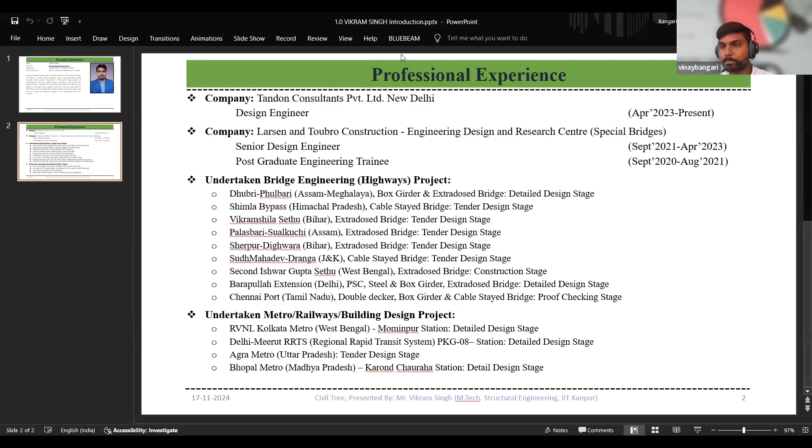Okay, I think I can stop screen sharing. Okay, so just give me a minute. I will start my presentation. Okay, so I hope my screen is very clear and visible to everyone. Yes, it is visible, sir. Thank you. Thanks for the confirmation. So today's webinar, we are including, just a sec. I will just make myself comfortable with the screens because I have two, so I have to take care of everything here. Okay. So thank you very much, Vinay, for introducing me.

Today we are going to have a webinar over the topic, bridge engineering. The broad topic is bridge engineering, but we will be covering a lot of things in this session, starting from the introduction to the bridges, what is a bridge, what kind of bridges we have in our Indian history or Indian modern era, then the classification of bridges, the components of bridges, then design and construction challenges.

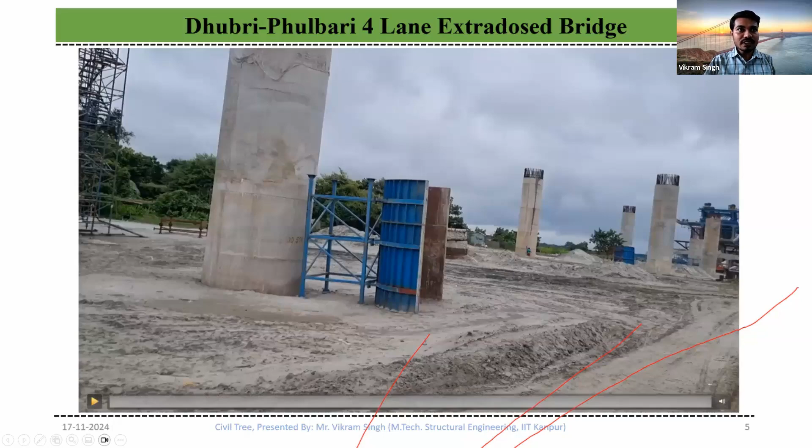Okay. So I will just play this video and I will ask you if the audio is audible to you or not. Hey guys, आप सबको स्वागत है हमारी ओर. Hey guys. I hope it is audible to all of you. Yes. Yes, sir, audible. Okay. Actually, sometimes Zoom meeting does remove the sound from the video. That's why I just thought to confirm.

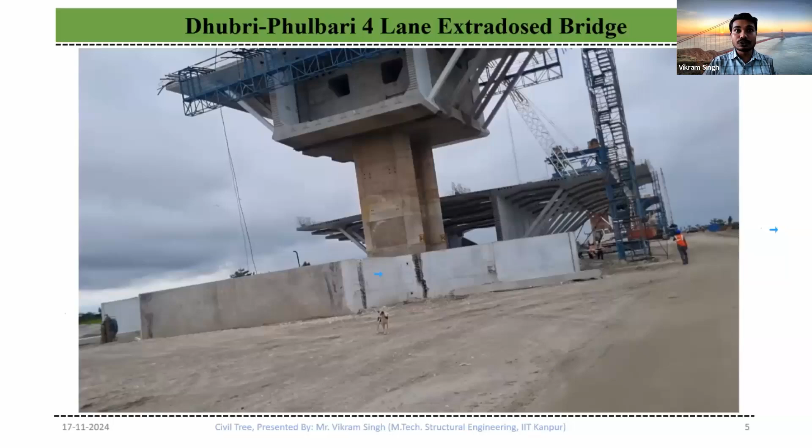Even if one single segment of the box girder fails, it will cost you a lot. And we are just talking about the concrete, but you can calculate the reinforcement also. You can see there was a lot of reinforcement in this. And furthermore, you can see the kind of machinery they are using. These are two heavy machineries utilized in a construction project. And later on, if you see here, this entire arrangement of steel stairs is anchored with the blocks here.

So the equipment you are using, the material you are using, the reinforcement, any big thing here imposes a bigger challenge in the construction industry. So if you are in design, it's okay. But if you are in construction, you already know that there are thousands of challenges on site. That does not mean that there are no challenges in design. The challenges in design are different, but construction challenges are far apart and way beyond imagination. I will not explain everything here because there are a lot of things to say.

Someone has put their arrow here. Can you remove it? On my screen, there are two arrows. Vinay, can you please take care of it? Who has marked these arrows? No, why is that arrow coming? Okay, we will continue with this.

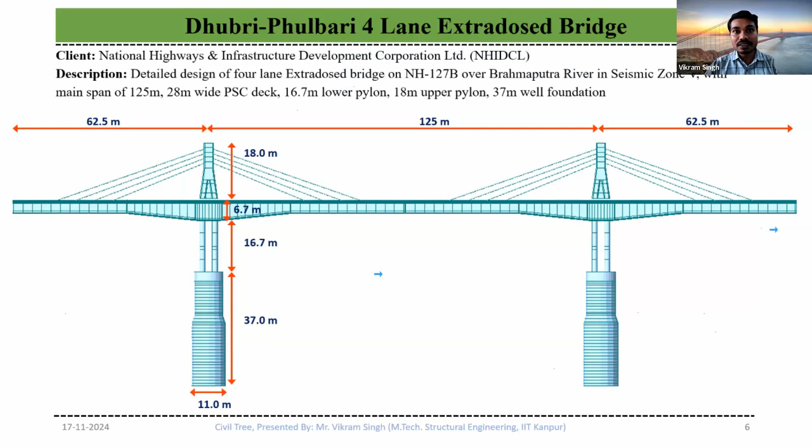So this video you have seen here, this is a general arrangement drawing of that. This is actually a model, and you can see the dimension detailing. The lower pylon is 16.7 meter and the upper pylon is even bigger than that. This is actually an extradosed bridge. We have 4 cables on both sides, and the span of this bridge is 125 meter. So you already know that constructing a 125 meter bridge span is a big challenge in the construction industry itself. So this is how it looks in the isometric view.

So without further delaying our session, we will continue with the introduction of what is a bridge. In general, a bridge means a way of connecting two places. If you can connect the two places by any means, then it is termed a bridge. A bridge is a structure brought forward under construction to surpass an obstacle. If you have something you want to surpass, you have to construct a bridge. That does not mean a bridge is the only way to connect two places. You can connect by bridge, by tunnel, or by other means also. But a bridge is one of the best forms. It is more economical than the other forms.

A bridge is required without affecting the properties of the obstacle significantly. If you can alter the properties of your obstacle, like in a hilly region, if you can cut the entire hills, then what is the meaning of a bridge? You don't need a tunnel, you don't need a bridge. You need a tunnel in that case because you want to dig inside the hills, right? So bridges and tunnels are the two ways of connecting places by means of elevation or underground.

Okay, it provides a passage over an obstacle. The bridge is an elevated structure, so it will provide the passage over the obstacle, and a tunnel will provide you the passage under the obstacle. So you can see a few images here. And one of the biggest challenges the construction industry has is construction underwater.

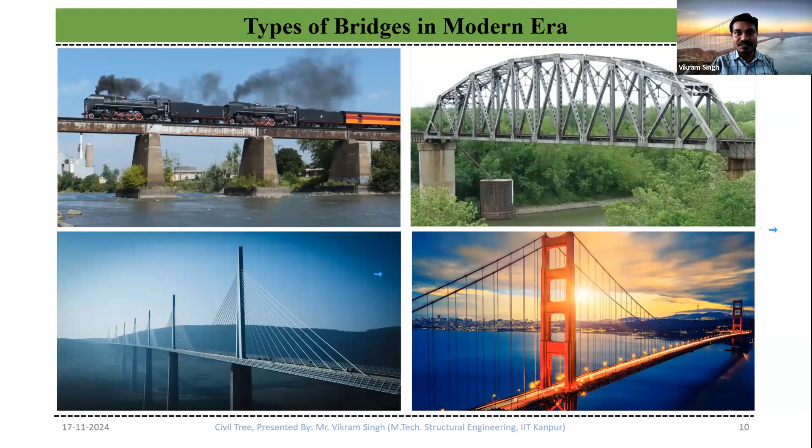So what are the different components in a bridge? If you see a bridge, you will see the piers, superstructure. Then these are far different from the buildings what you see there.

The substructure of a building is below the ground, but in case of bridges, the substructure itself is above the ground. So how do you identify what are the components of the bridges - what is a superstructure, what is a substructure, foundation?

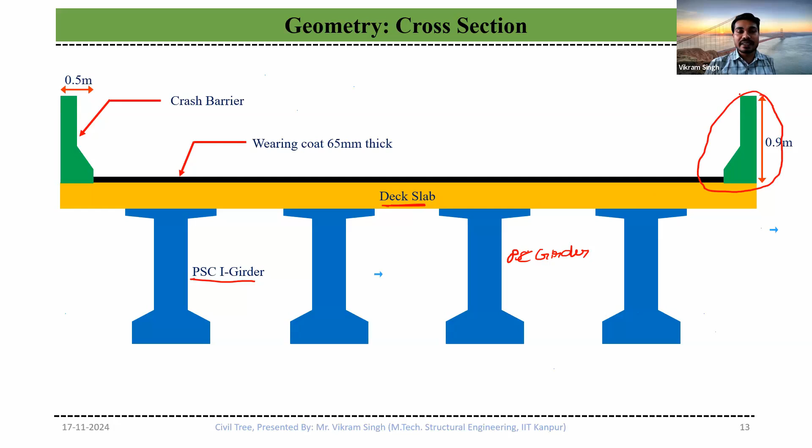So when you are going to design a bridge, your first and foremost concern is to find out which geometry of structure is more suitable for your construction. Because if you remember the first video, that was an extradosed bridge. So why not construct a normal RCC T-beam or PSC I girder? Because there was a special requirement.

We need 100 meter of clearance between the two piers, so that will define my span length. Since the clearance requirement is 100 meter and my well diameter itself is 11 meter, just to maintain that, we made and fixed the span of 125 meter. So if you are going to design a bridge, you have to identify which span length is more suitable for you. Now let's understand the importance of the bridge design engineer.

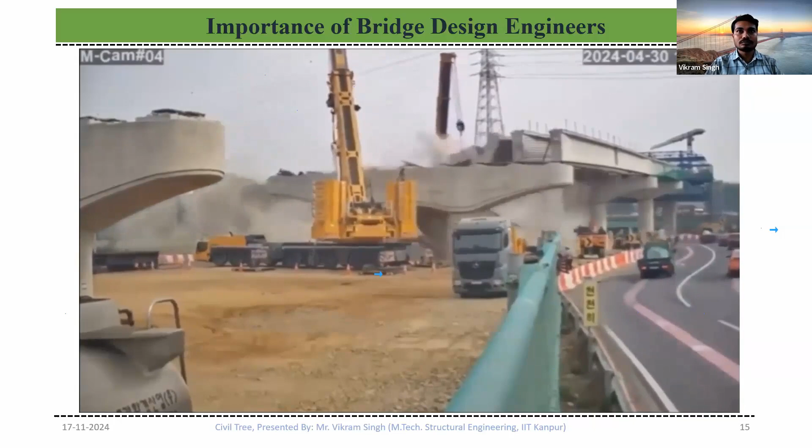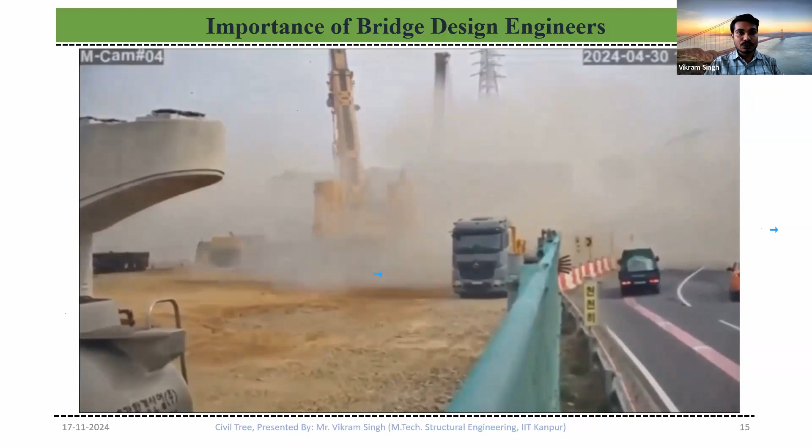Just imagine, it may be some 30-40 meter span. Each girder weighs 70 tons, so that will account for approximately 25 meter cube of concrete per girder, and there were some 8 or 9 girders. Now just see for yourself how much wastage they have done and what kind of error, which scale of error they have made here.

So we need the bridge design engineer who can ensure that if you use this thing or this procedure, your bridge will remain serviceable, it will not collapse. But it is not the sole responsibility of the design engineer.

As a design engineer, we can give the drawing saying this is my procedure of construction, you follow this and this bridge remains serviceable and it will not collapse. But what if the site engineer or the authorities working there, instead of M50 grade, they use M20? What will happen? So the responsibility of bridge serviceability is the combined responsibility of a design engineer and a site engineer.

The next thing you can see, this is one more bridge collapse. This is a recent one, I don't remember the name, it was in the Western India region.

Now let's understand what is the workflow in the construction industry. When you have a project, how do we know how this project will be allotted? So first one is the client. Client can be your PWD, NHAI, MORTH. They want to construct a bridge or an infrastructure project in the country, so they will allot a tender.

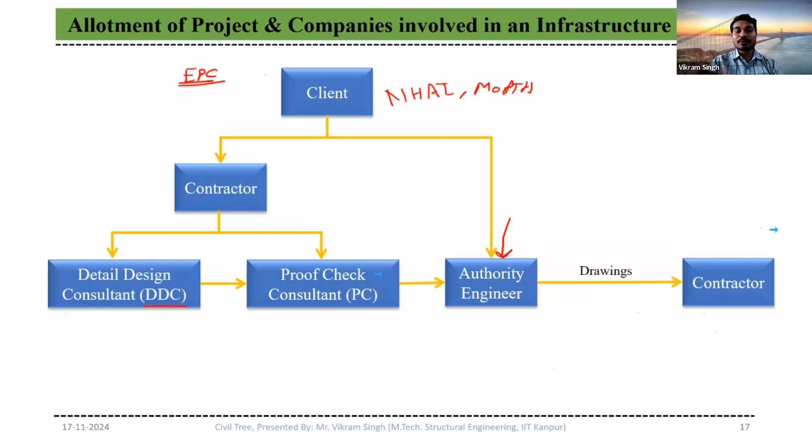Then the client, being the first party who does not know exactly who has been hired or what they have done in the design, will hire an authority engineer, called AE. He will check the design after it is designed by the DDC and checked by the proof checker. Then the authority engineer will check the final design and approve it. Only then will your drawings move forward to the contractor and then go to the site for construction. So this is the procedure in EPC mode.

Then I hope you have heard this term AEC industry. So AEC stands for architecture, engineering, and construction.

In highway bridges, architecture plays a very minimal role, or in most of the project, it plays no role at all. Because when constructing a bridge, you need to decide the length of the span, the total length of the bridge, and the height of the bridge. Architect does not play a significant role there unless you are preparing a structure which plays an aesthetic role, just like Durgam Cheruvu Bridge, which has a very pleasant view at night. Architecture has to play a very important role in that, but in general, if you see the flyovers, architect does not play any role in that.

So architect is not useful in the highway bridges, but it is compulsory in the metro bridges or metro stations, and it is very important in terms of buildings, as you're already aware. So the planning of a structural and non-structural component with basic knowledge of engineering and construction, that is the role of an architect.

Now, if you go to the engineering, whether the architect is there or not, it's the responsibility of the engineer to design it. That does not mean the person working on the site is not an engineer - they are site engineers, but engineering here in this regard is termed as design engineering. So engineering especially refers to the design engineer.

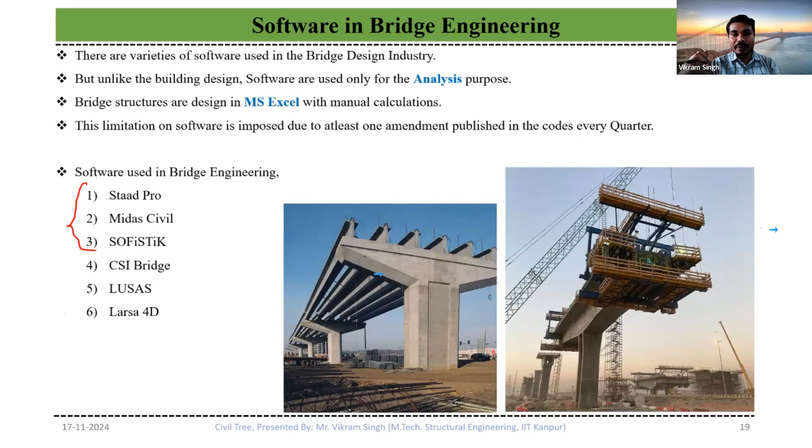I will show you also. At least one of the codes will be amended each quarter - you will have 4 to 5 amendments every year. And you cannot rely on the software being amended for that amendment received from the codal committee. So it is a general practice to analyze the structure in the software and design it in an Excel sheet. And analysis does not just mean that you input something in the software and get an output - you have to verify that your analysis is correct or not.

So this is a snip of the Staad Pro software, and this is a snip from Midas Civil software. If you see, Staad Pro and Midas Civil are almost similar. You have the main menu, geometry, view, select, specification, type of design, material properties, specification, support - similar kinds of options are available here. View, structure, properties, boundaries, load, analysis - similar options. The only thing is Midas has certain options which are not available in Staad Pro.

One of the best things about Midas Civil, let me write it here - the first thing is construction stage analysis.

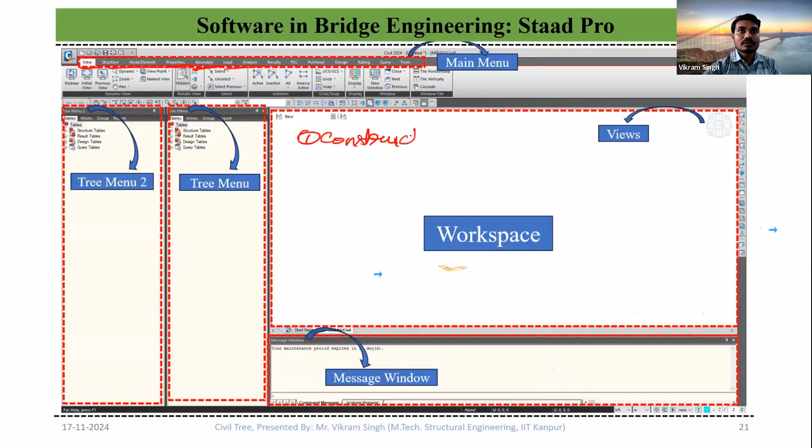Unlike the buildings, where you are designing the entire building and you do not check for the intermediate stage, the bridges need to be designed for the intermediate stage also. And I also think that pre-stressed building structures are also being designed and analyzed for the intermediate stage. Now, why do we need this intermediate stage?

When you have a girder, there is no load. Then what will pre-stress do? Pre-stress will try to lift the girder upward, so the tension will come on the top side. But when your bridge is in the static condition and you apply all the loads, the bridge will deflect downward, so the tension will shift to the bottom fibers. So you need to verify that, due to the pre-stressing and all the loads, none of your concrete fibers goes under tension. That is a codal limit specified by IRC 112.

Then the third software is Sofistik. This is also used in the Indian market, but not more than 5% of consultants are using the software because there is some complexity in the software itself.

Then there are a lot of design standards. Like IS 456, the mother code for bridge engineering is IRC 112, the code of practice for concrete road bridges. We are especially talking about concrete road bridges, and any highway bridges may be steel or concrete, but the deck slab always remains concrete. So there is hardly any possibility that IRC 112 will not be utilized for the design purpose. You may be using a lot of other standards, but IRC 112 remains the mother code. So 112 is for the design.

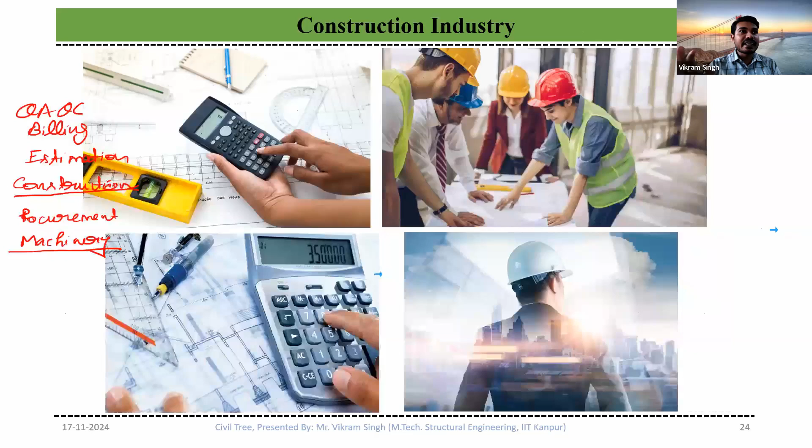Then after the pre-stressing on the site, this is girder lifting. This is the deck slab casting; then you have the deck slab casting over the top. So there are a lot of different activities involved in the construction, and these are just the construction. The activities we discussed in the last slide are even superior to this. So coming to this, let us see how a PSC I-girder is cast. But first let's understand the grouting procedure.

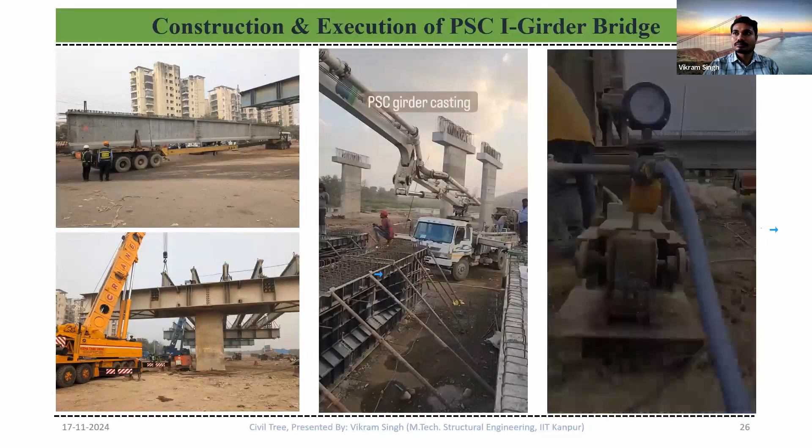Okay, so grouting is the final process of finishing the pre-stressing procedure. Once you input your tendons within the duct, then you have to introduce a cement slurry in the vicinity of pre-stressing tendons. Otherwise, the pre-stressing is also a steel; it may corrode. Okay. Now let's see what is the construction of a PSC I girder.

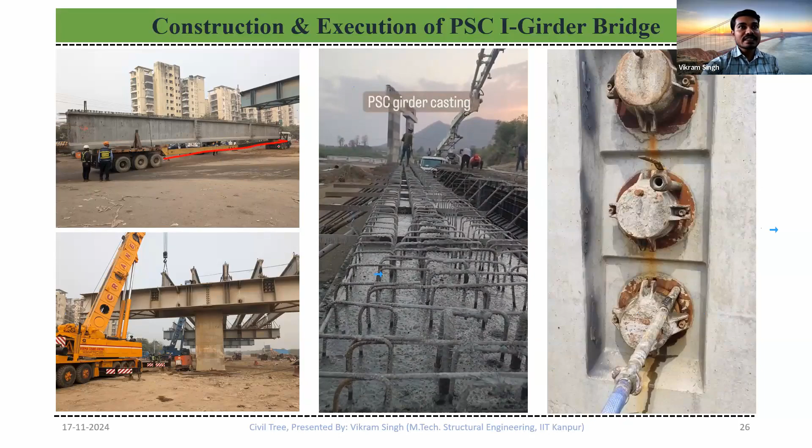So this was the procedure to construct a PSC I girder for the bridges. The PSC I girder, this is not the same image, but how do they construct and how do they transport on the site? That also you can see. This is a 30-meter span. Can you imagine how long a trailer you need to transport it and how much space you need to transport it? It is not the kind of girder you can just lift and keep over the trailer and move on the road. It is not possible.

And on the bottom side, left bottom corner, you can see the placing of the girder with the help of cranes. Now let's see and understand the construction of a box girder bridge.

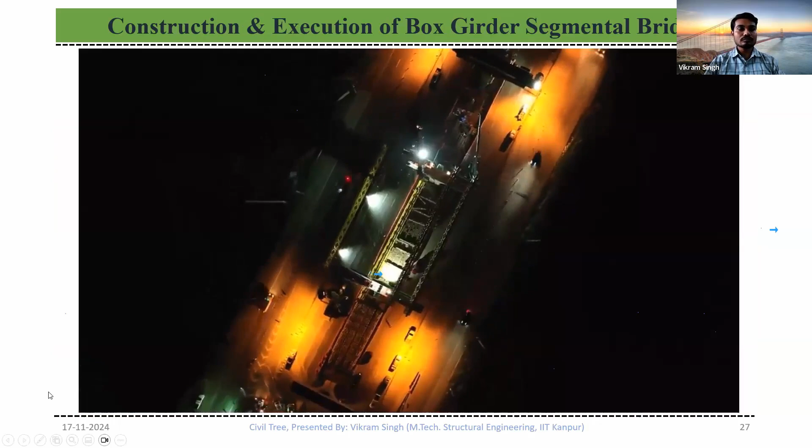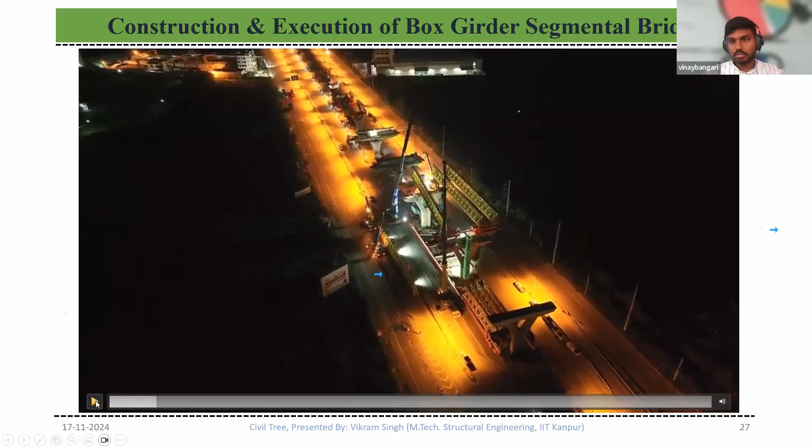So your voice is not audible. I will request you that you turn on your volume to the maximum amount, maybe 60-70% at least. Then you will get the full purity and the intent of this video.

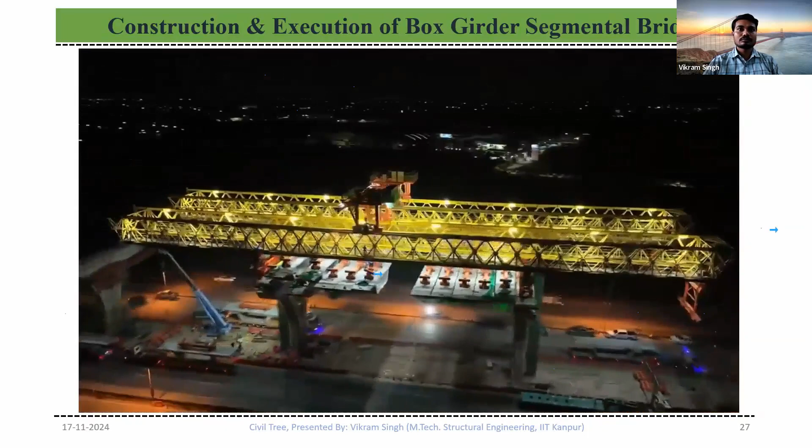I hope you can see the scale of the project. Even to construct a 30-meter span, you need a 60-meter length of launching gantry. So we need a specialized mechanical department to handle all this. Now let's turn towards the challenges in the bridge engineering industry. And these include all the challenges I could find about the designing, construction, and everything.

First of all, the design challenges. When you have pre-stressed concrete, designing it is not as easy as RCC, because we have to check and verify it in the intermediate stages also. Then local failure is very common in case of bridges. Site constraint, because the bridge design engineer cannot design a structure without knowing the site constraint. Long span bridges is another vast field to work and dedicate your career in bridges.

Then coming to the construction challenges, borehole collapse is one of the major challenges even we as design engineers face, because once a borehole collapses, I have to design my pile or well for the second location. It causes a secondary challenge. Underwater construction, you can see here, construction of bridges in the sea area or in the rivers. Quality control, activity schedule, and leveling. These are some of the major challenges we face on the site.

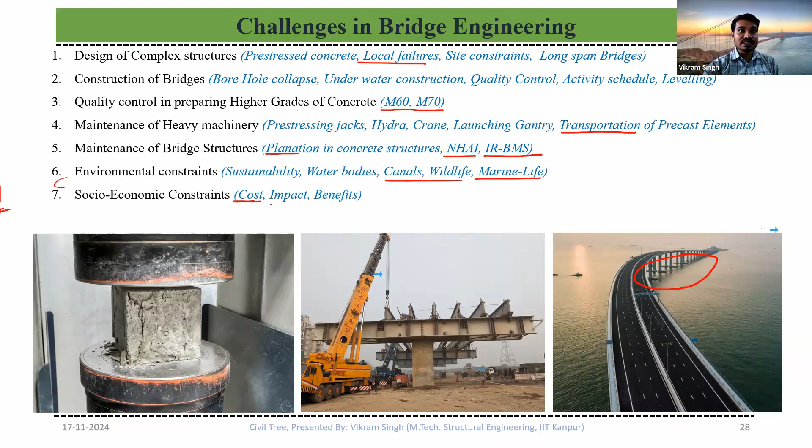Then we have environmental constraints like sustainability, water bodies, then wildlife, canals, marine life, you cannot disturb them, and socio-economic constraints: the cost to construct, how does it impact the society, and what kind of benefits you will get after the construction.

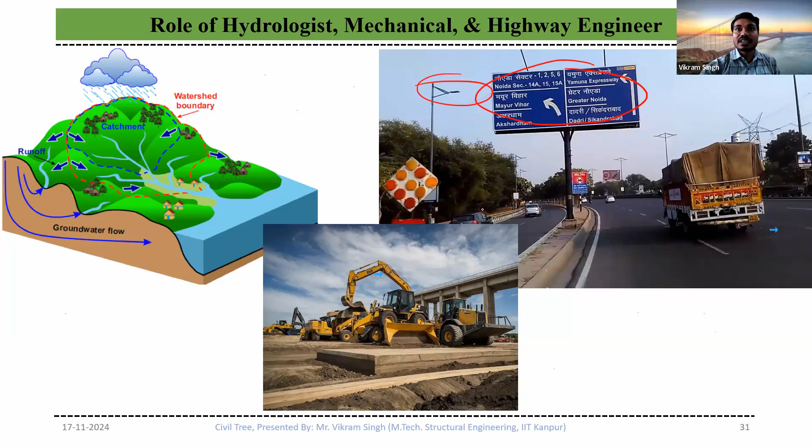Then let's come to understand the roles of other domains in the bridge engineering industry. We need a hydrologist, because when you are constructing a culvert, normal bridge or small span bridge, how much water will flow below that, you need a study of that. So you need a hydrologist. You need a mechanical engineer, because there is a lot of machinery working on the site. Then you need a highway engineer. The highway engineer will ensure the signboards we have here, the light posts, the railings, medians, everything, it is their duty.

Now let's understand the role of a geotechnical engineer. Testing of earth strata, to assess the quality of soil and the bearing capacity of soil. This is the prime, governing and primary role of a geotechnical engineer. Then when he tests, he has to provide his factual report and interpretation report to the structural engineer, who will be performing the software design and analysis and prepare the drawings for the construction.

Slope stabilization is one of the major challenges geotechnical engineers face. We'll see this in the next slide. And design of complex foundations. When you have a foundation which is not conventional, then you need a specialized agency with expertise in geotechnical engineering. And you also need the geotechnical engineer to assess the local failure of earth during the construction.

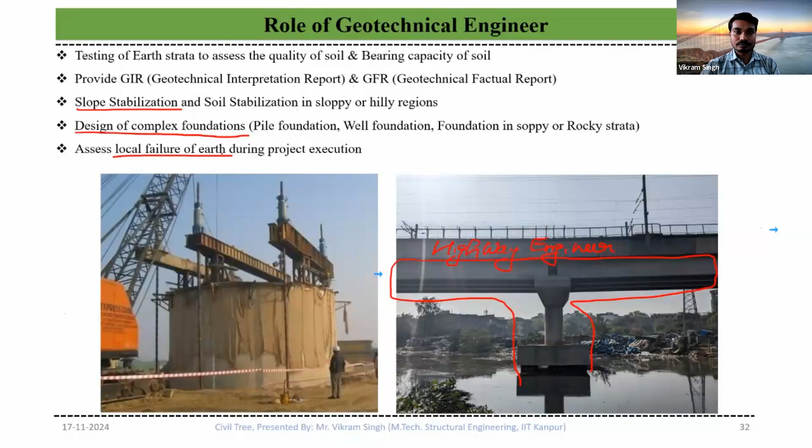Then let's come to the most important topic of today's session: career opportunities in the bridge engineering industry. So this is just a funny video. Let's see this.

I am a civil engineer. It's an interesting course. They teach you a lot of good things. They teach you how to build buildings, how to construct bridges, how to build railway lines. The only thing they forgot to teach us is how to build a career out of this.

So if you also feel that you have learned a lot of things and are still stuck in your career, then we are going to discuss the same thing in the upcoming slides. So first of all, a lot of people ask me the question, is it worth pursuing bridge engineering? One of the major questions, is it worth it? If you are joining this industry, bridge does not only mean a highway bridge or railway bridge. We will discuss it later. But any kind of bridge, if you want to pursue your career in the field of bridge engineering, is it worth it for you? I will ask you certain questions regarding this.

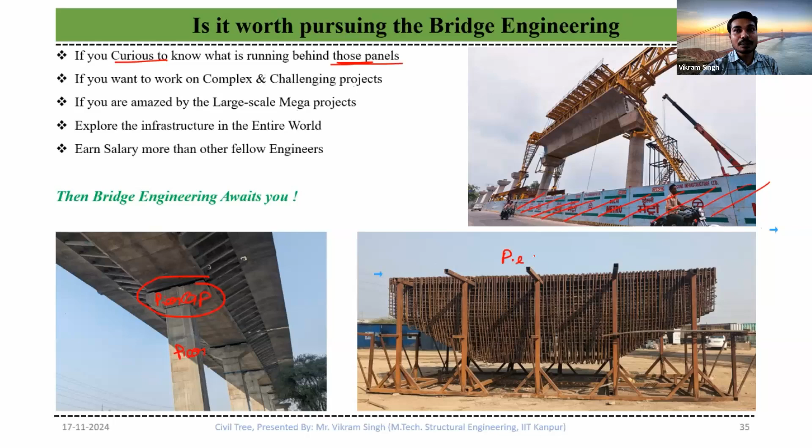And you can see the complexity also. You can see this element. This is my pier, and on the top of this, this is called the pier cap. And on the right side, this is the pier cap reinforcement.

If you want to learn how to design all those things, how to construct this thing, if you want to peek inside, you will not see anything. It is such dense reinforcement. If you want to work on this, if you want to learn this, then yes, the bridge engineering industry is waiting for you.

Now the next question, how much formal qualification do you need? Do you need a BTech degree? Do you need a BE degree? Do you need an MTech or an MS or what? The big answer to this question is you don't need a master's degree in structural engineering to become a bridge design engineer. That is the first thing you have to tie with yourself, that you don't need a master's degree to become a structural engineer, bridge design engineer.

I will also not say that it is not required at all, because out of 100 companies, maybe 5 to 10 companies really need the master's degree only. If you want to pursue your career in those companies, then yes, you need the master's degree. But a lot of companies, even the big companies, don't need a master's in structural engineering to onboard you as a structural engineer in bridge engineering.

I hope you know this person, Muhammad Aatif Nawaz. He is currently working in Atkins Réalis in the Bangalore office. And when he was asked this same question, he also replied the same thing. MTech is not a compulsion to be a structural engineer in design. It all depends on your passion and how well you know the subjects.

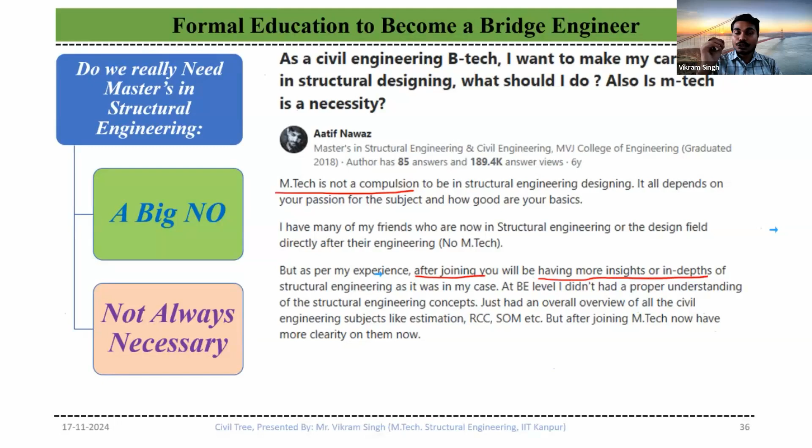But one thing we both agree on, as per experience, after joining a master's you will have more insight and depth in the structural engineering subject. That is the only thing you will learn while joining and after joining your master's. If you want in-depth skills and knowledge of particular subjects in structural engineering, join the master's in structural engineering. But if your passion is to design structures, to work on structures, you don't need a master's degree for this.

Now, let's explore the different types of career options available in the bridge engineering industry. Some of these career options are in design, some in construction, some in the BIM field. So let's proceed and understand what you need and where you can explore your field. How to proceed to make a career in bridge engineering? That is the first question. Because a lot of candidates, even among you who have joined the session, either have minimal experience, certain experience, or you are a fresher, a beginner.

So if you are a fresher and you are not getting big consultants to work with, then at least start from a local consultancy. I have several friends and colleagues who started from a very small level, and today they are working with me. Within 4 years, they developed their skills to such a level that we work together. I did my master's from IIT, one did his master's from somewhere else, and one of them did not even do a master's. He pursued his BTech from a local college, and we 3 are working together in the same organization, sitting at the same desk.

When you start from a local consultancy, you gather certain experience in the engineering field, be it design or construction. You have to gather certain experience and then you go to the big firms. And if you still want to go for a master's, then yes, that is also one of the options you have. But one thing I will suggest, if you are going for a master's, then go for tier 1 or tier 2 colleges, because below that your degree has very little meaning or value.

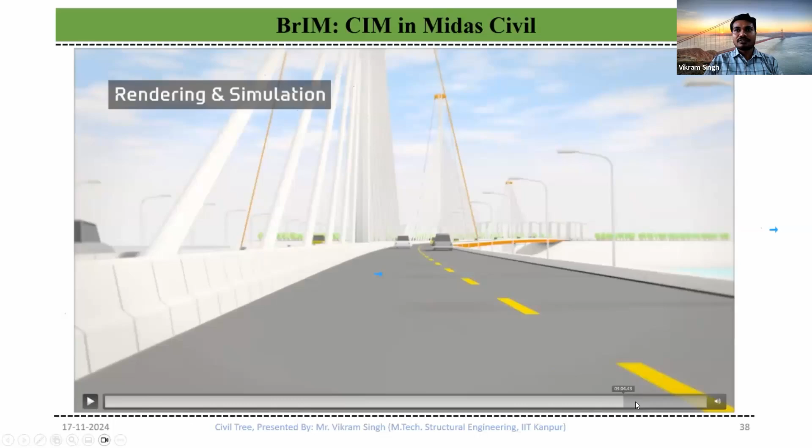So the videos we are watching here, this is Midas Civil Software. Midas is the parent company of that. And they are developing a CIM, Civil Information Modeling. And we have a lot of parties involved here. This is called Midas CIM. So all of these works and softwares combined with each other are being developed by the Midas company. And maybe within the next 1 or 2 years, they will hand this over to the consultancies also.

So now let's move forward. Tips and tricks for when you are going to a bridge engineering interview. You don't need to have a prior understanding of bridges itself. If you are experienced, the case is different. But if you are a fresher, you don't need to be experienced in bridges, or be aware of IRC 112, because every consultancy knows that you have not studied bridge engineering in your academics. So they already know you won't be knowing about bridges.

But what you need is a basic understanding of IS 456. So what does it imply? If you are fluent in IS 456, if you know the basic code provisions which you have read in your academics, then the company will be rest assured that when you start working on bridges, you will learn things, because ultimately the company is there for their own profit, not for ours. It's our responsibility to make the company profitable to pay your salary. So they are checking your prior knowledge, whether you at least know this. If you know this, that is sufficient for the interview.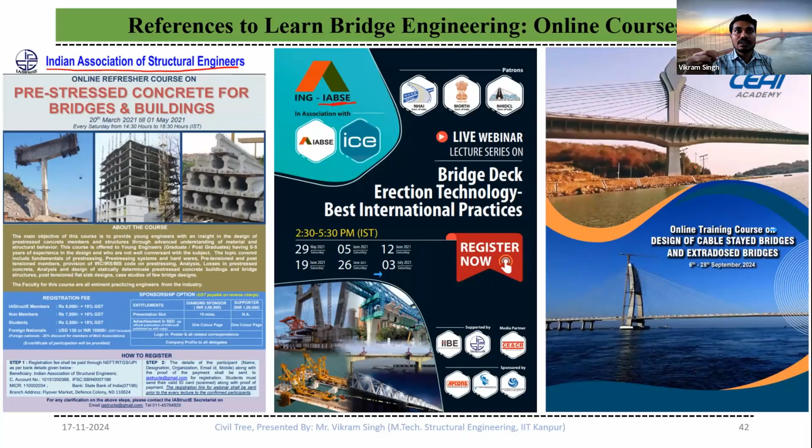Then the third thing is, if you want online lectures, you can go through the NPTEL course on bridge engineering taught by Professor Pyal from Dhanbad. This is the best online lecture you will find in the field of bridge engineering. In fact, I have pursued this course personally on my own.

Then the most important and best thing to learn bridges is to go on site. If you can join a site and learn from it, that is the paramount skill. You will never forget it, because that is an experience you will feel on site. After 10 years, you will remember that you went on site in 2024 in December, and what you learned there. You may not remember online courses, but experience you will always remember.

Now this is the last part of our session today. We have covered everything - bridge engineering, the career field, growth, and resources to learn. We have discussed what is a PSC girder, box girder, the construction aspect, challenges, and design. Design cannot be explained in a single session, because unless you know the exact construction procedure, design has no meaning.

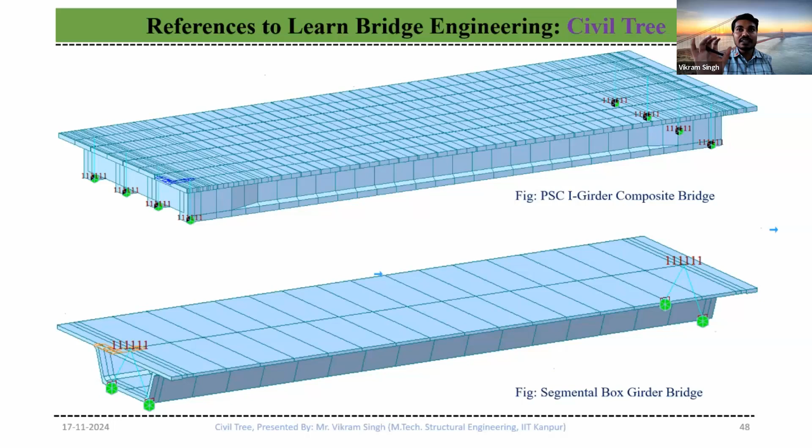This is a prototype of the structure we are carrying in our course. This course is termed pre-stressed concrete bridges. We are covering the superstructure design of PSC I-girder bridge and box girder bridge, which will cover almost all of your pre-stressed concrete bridge types.

But what if your grade of concrete increases? What if you have M65 or M90 grade of concrete? What will happen? The ultimate strain, which was 3.5 percentile, 0.0035, will change to 0.0028. This means your ultimate failure strain changes with increase in strength of concrete, and your yield strain will increase as you increase the grade of concrete, so this will become 0.0024. So the value of 0.002 is changing to 0.0024, and ultimate strain of 0.0035 is changing to 0.0028. The margin between the ultimate and yield stress itself reduces. This is the first finding when you increase the grade of concrete.

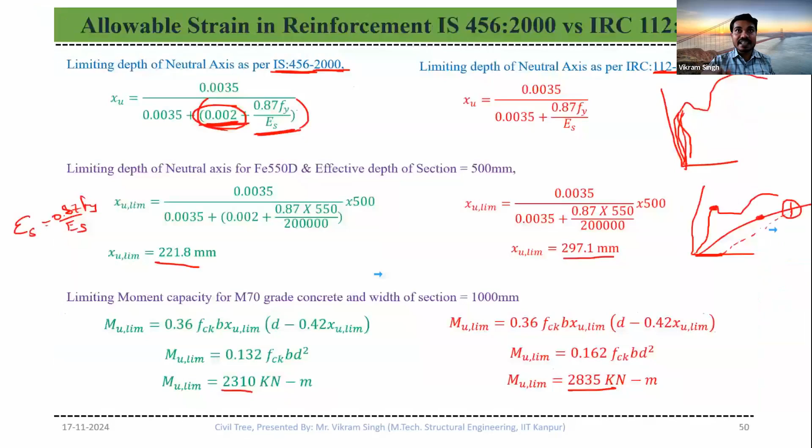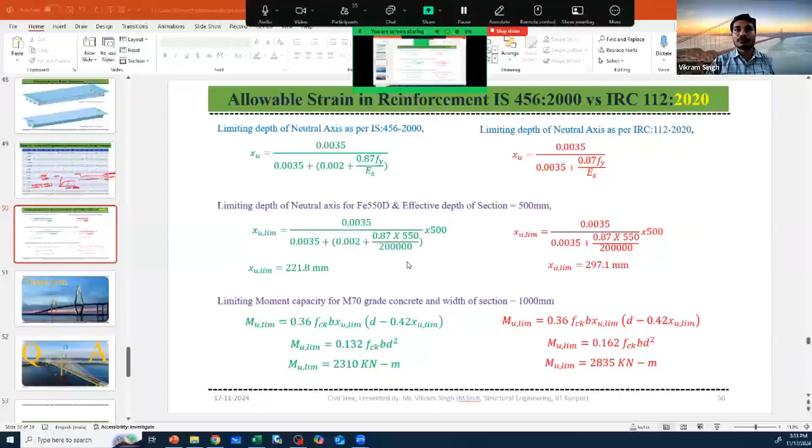And the second thing, one of the major things, just give me a second. Where is it? Yes. Okay, I hope it is visible to you, right?

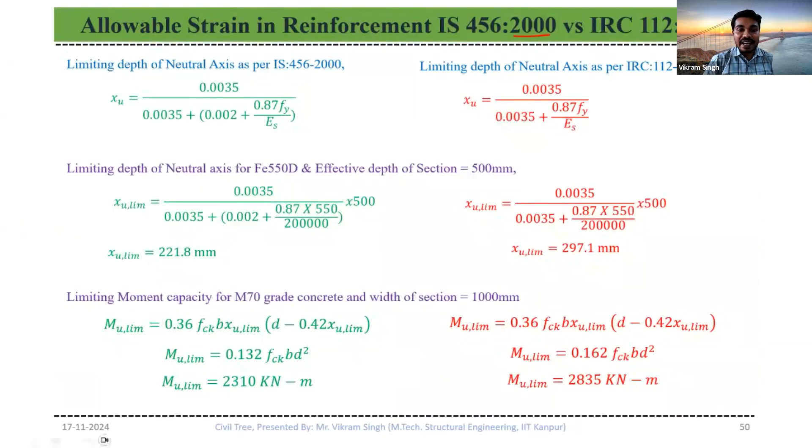Yes, okay. So one of the major differences you will find between IS 456 and IRC 112 is their publication year. IS 456 was published in 2000, and IRC 112, the latest version, is 2020. Now why am I highlighting the publication year?

Any questions? No? Okay, so tell me, do you remember the assumption of IS 456, the limit state method? Can you tell me what is the minimum tensile strain of the reinforcement as per IS 456? Maybe some of you are already working in the design field. Anyone? If you know, please tell me what is the fifth assumption of limit state method? No? Okay, I will tell you.

The minimum tensile strain of reinforcement as per IS 456 2000 shall be 0.002 plus 0.87 Fy upon ES, right? Now the question is, what is this 0.002? I hope at least you will be getting an idea. Can anyone tell me what is this 0.002? If you cannot explain this, how do I understand that you are getting the concept from this session?

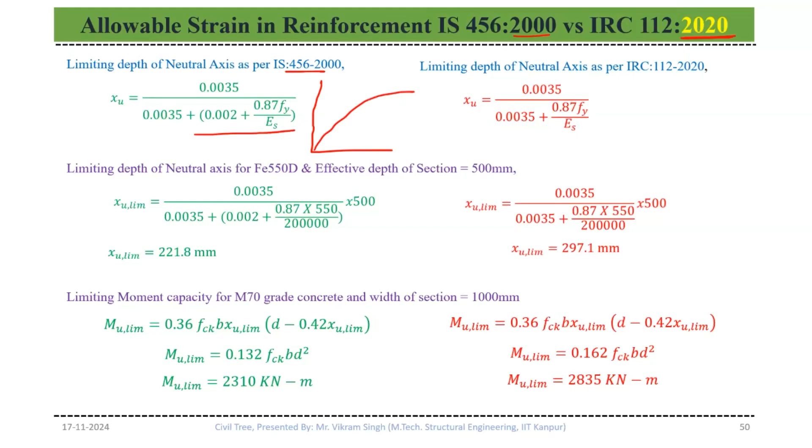Yield point? Yeah. So in case of IS 456, with FE 415 and FE 500, when we were working in the era of 2000, the point of finding the yield stress of the reinforcement was not that easy. So the code says you draw a point of 0.2% strain, draw an initial tangent parallel line, and wherever it cuts, that is the point of yield stress. So the sum of the first zone and the second zone comes out to be 0.002 plus 0.87 Fy upon ES. Although 0.87 will not be captured in this image, 0.87 Fy is the partial safety factor. So this is the failure strain in the reinforcement.

But what if I tell you that in the modern era, it's been 2 decades, we have the procedure to find out the exact point of yield stress. Do I need to use that 0.002? We don't need it, right?

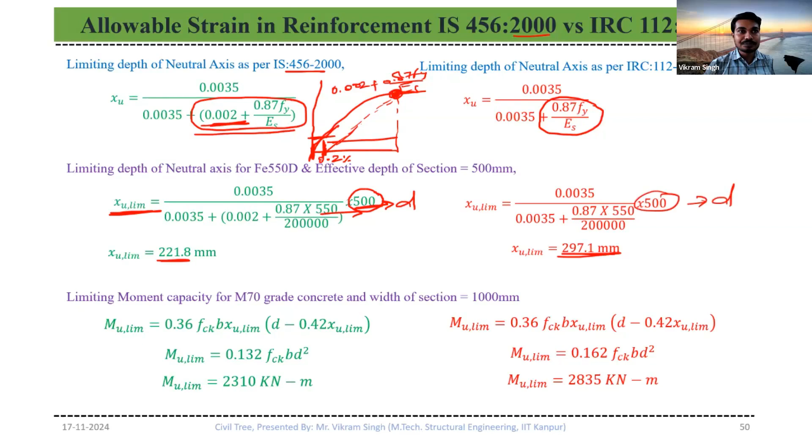So if I remove this 0.002 and calculate the actual limiting value, I have just put the value of Fy as 550. If you calculate the actual limiting value, this is 221, and this 221 is coming for an effective depth of 500 - this is my assumption here, this is my effective depth. If I assume my effective depth of 500, then the actual limiting value is 221.8 as per IS 456 and 297.1 as per IRC 112. How does it affect things?

You can see the bending moment calculation at the bottom. The first one is 2310, and as per IRC 112, this is 2835. If I use the calculator to explain, this is 2835 minus 2310 divided by 2310, which is 22.7% higher.

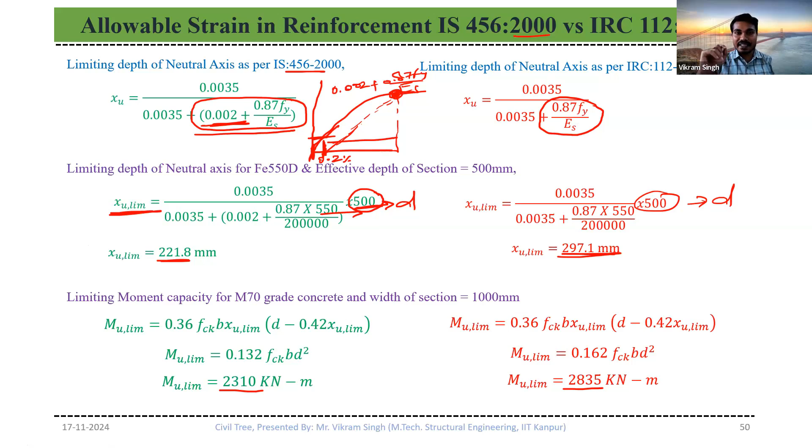There are certain differences in the design methodology of IS 456 and IRC 112. The shear design of IRC 112 is totally different from IS 456. If you are aspiring to work in the bridge engineering industry, especially in highways, you will encounter totally different design procedures for shear. The basic mechanics remains constant for both, but the design standards given in IS 456 and IRC 112 are different. So half is constant, half is different.

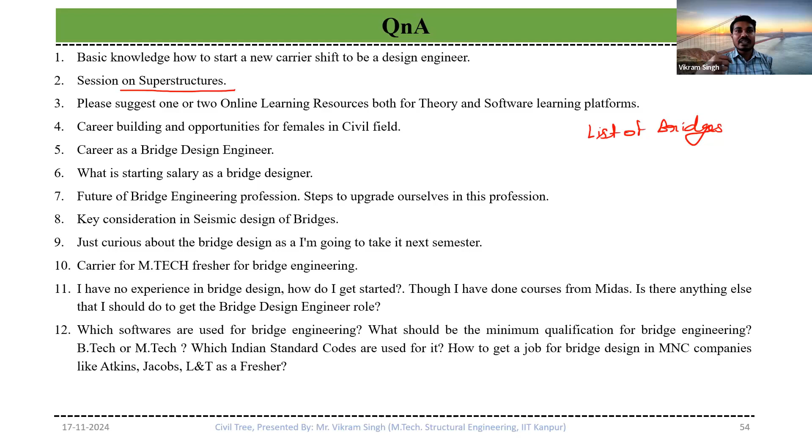Next question, 13, scope and future of bridge engineer. Very bright. How to take independent project from firm and government organization. I don't want to answer this question because there is a lot of debate about it. If you want to understand, we can better connect over a call. Roles and responsibilities, we have discussed.

Manual versus software approach for the design of the bridges. If you give me a bearing supported structure, the simply supported structure, okay, you tell me, you are aware of the bending moment and shear force for a simply supported beam. All the bridges, most of the bridges are simply supported. Can you design a bridge structure? If you're confident enough that you know simply supported bearing resting structure, can you design the bridge structure?

It is really difficult. Why? Because we have understood that we can design it. But when you reach the design, you will find thousands of points which we never thought of earlier. So when you are going for the design, it is neither only manual, nor through the software only. It is a mixed approach. We have discussed also that you have to model it in the software, verify it manually, then design in the Excel sheet manually. Then soil mechanics and geotechnics structure analysis.

What advanced topics should an engineer master, such as finite element analysis, load combination analysis, dynamic load effect, seismic and wind? Okay, so this is the second question. So if you're aspiring to become a bridge engineer, you have to be aware of all the terms you have mentioned, but you don't need to be an expert in each and every field.

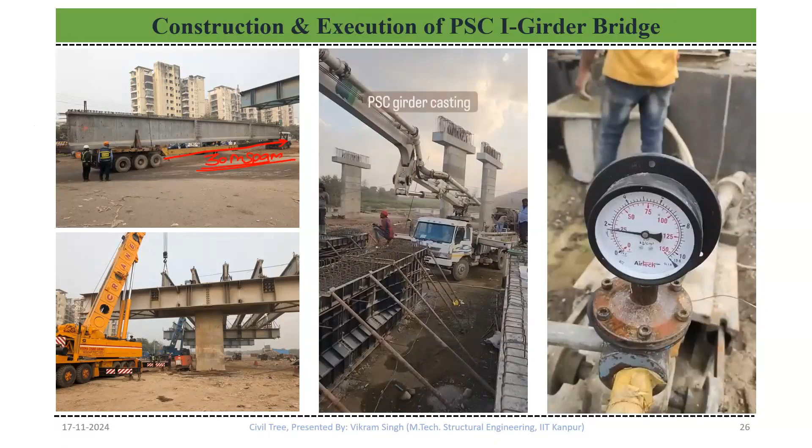Okay, sir. Next question. Sir, in one of your starting slides, pier cap thickness is very less. Pier cap thickness, last image, right? Yes. Pier cap thickness is very less. This one, right? Pier cap. Okay, this one. So you can see this, it looks very less, but this depth is 2 meter. So 2 meter is not less.

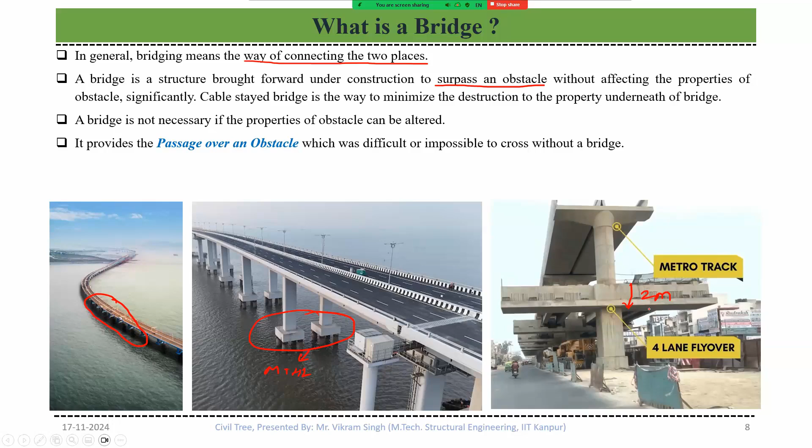No, at the top, sir. At the top, you are talking about this one, right? Yeah, that thickness. So this depth is around 1.5 or 1.6 meter. Is it pre-stressed or is it normal RCC? It is a post-tension pre-stress pier cap. So the bottom pier cap and top pier cap both are post-tensioned. Okay, sir. Thank you.

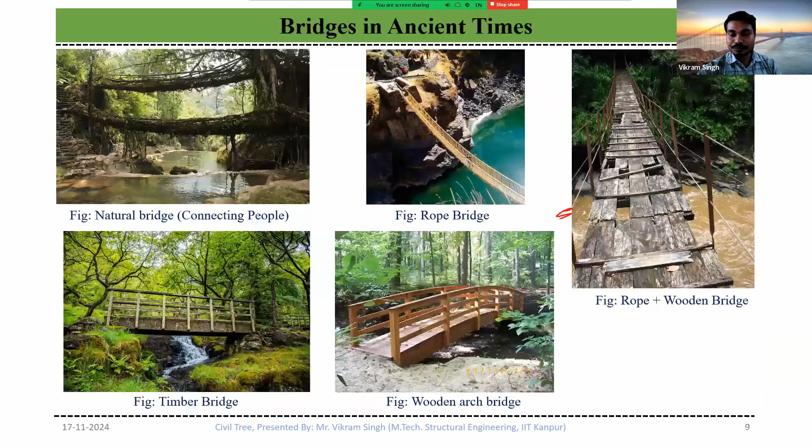Now coming to your first question, what is the intricacy of skew bridges? So when you are designing a skew bridge, let's say we draw a skew bridge. Any kind of load you put here, here, or here will be captured by this corner only, right? So you need to provide congested reinforcement in this corner. If I draw a bigger plan, then you need to provide all this reinforcement in this corner, and you have to take care of the Wood-Armer bending moment also.

If you are working in Midas, you will know this term. If you don't know, when you have skew geometry, you have out-of-plane deformations to take care of. And in terms of Midas, those are called the Wood-Armer bending moments. I will write the name.

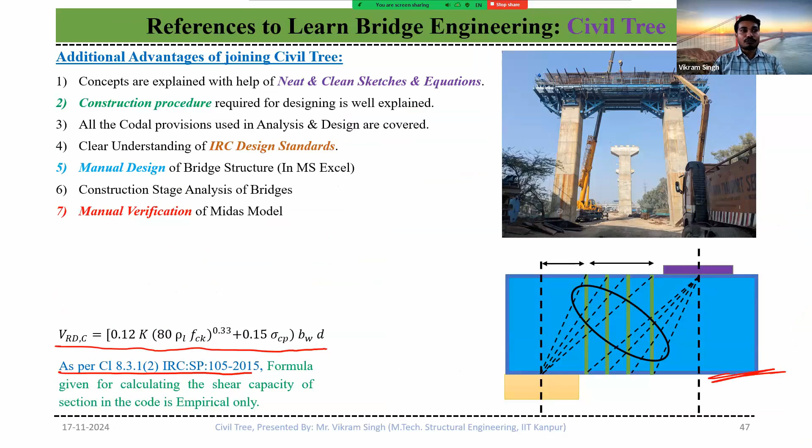Just like I had mentioned here in the next slide, VRDC equal to a certain equation. And you see below this, as per clause 8.3.1, point number 2, in IRC SP 105:2015, the formula given for calculating the shear capacity of section in this code is empirical only. How would you know this formula is empirical or not?

So all those equations, I have gone through all the codes. I know the implications, I know the understanding of the code. I will bring each and exact equation and code provision with you to share and to tell you that yes, this is the exact procedure you have to follow to design and analyze your structure.

Then after the analysis, we will be going for the design of PSC I-girder, PSC I-girder composite bridge, then design of segmental box girder bridge. Both of them we have seen in our session today also. So our topic of the course is superstructure design of pre-stressed concrete bridges. So we are including both PSC I-girder bridge and segmental box girder bridge.

So once you learn these two types of bridges, I'm pretty sure you will gain at least 80 to 90% of the entire bridge engineering industry in terms of pre-stressed concrete bridge design. Because these are the two most common forms of bridges in all the flyovers. You just exit from your home, watch any flyover, most probably 90% chances it is constructed with either PSC I-girder or the box girder. That's why we have chosen the topic pre-stressed concrete design of superstructure.

Then we will learn the design of deck slab, box girder segment, that is the longitudinal analysis and the transverse analysis.